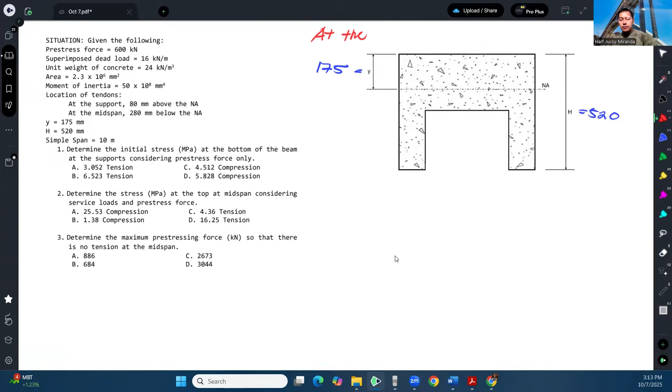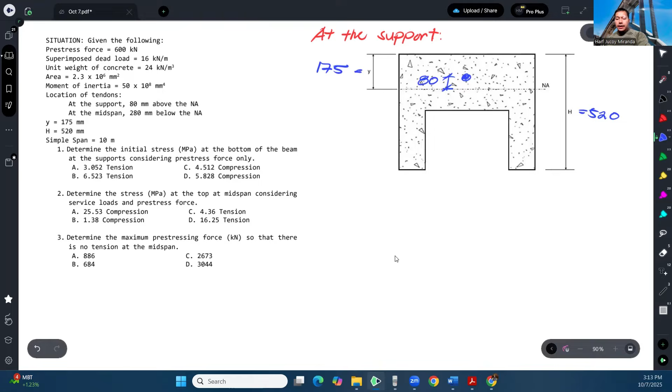So at the support, let me make a drawing. This is the drawing at the support, this is the cross-section at the support. So where is the tendon? It's here at the top, it is actually 80 mm - that's our eccentricity at the support. So if we look at the side view of the beam, it looks like this. This is the neutral axis, and this is the tendon.

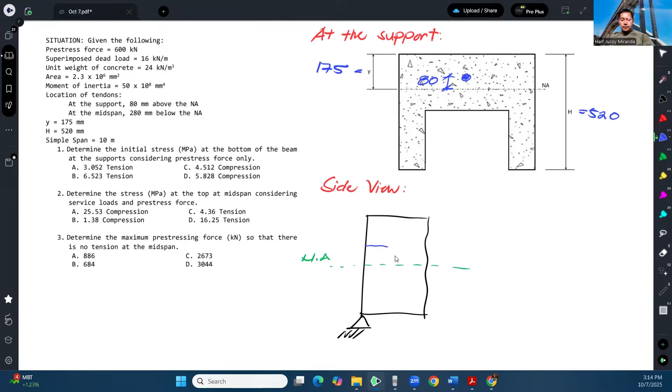I'll just draw it straight for simplicity, since this is at the end. So that tendon will have a pre-stressing force of P, which is counteracted by this and this. In this case, there's no mention of losses, so we don't need to worry about subtracting a certain percentage from the initial pre-stressing force - we will just use it as is.

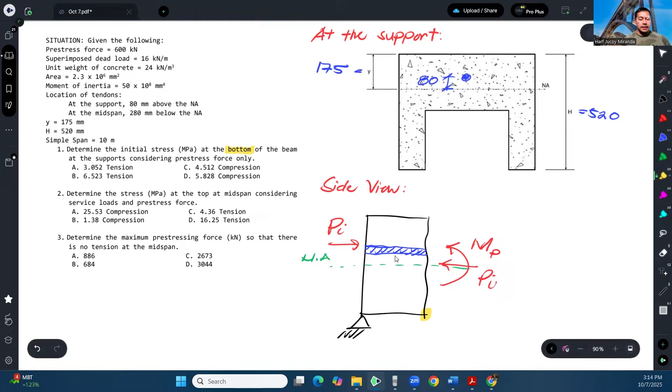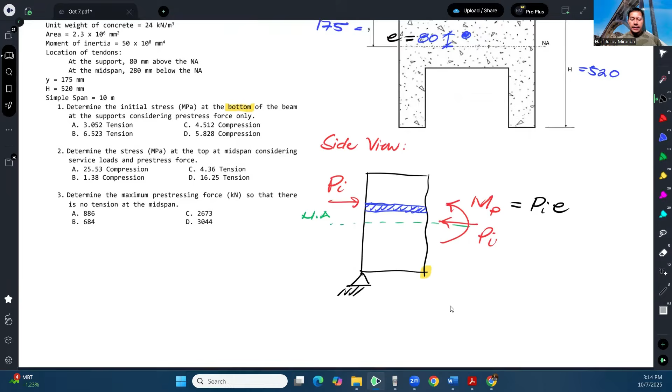So the question is, what is the initial stress at the bottom, here at the end of the beam? So what is this moment? Due to the pre-stressing force, that is the pre-stressing force times the eccentricity. In this case, this is our eccentricity. And then our distance to the bottom - this is the bottom - that distance is just 520 minus 175. We will need to apply that later.

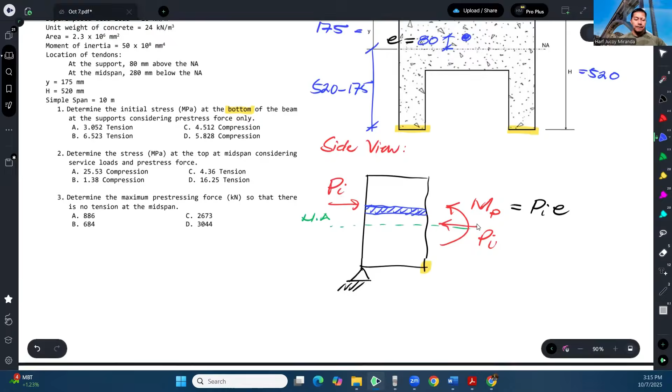So now, to calculate for number one, the stress at the bottom at the end of the beam, let's assume the convention that tension is positive and compression is negative. There's nothing wrong if you reverse your convention - that's okay, as long as you stay consistent. So if you say negative, that's compression, if that's your assumption. If you want it reversed, that's also fine - make compression positive and tension negative. Just stay consistent with writing the equation.

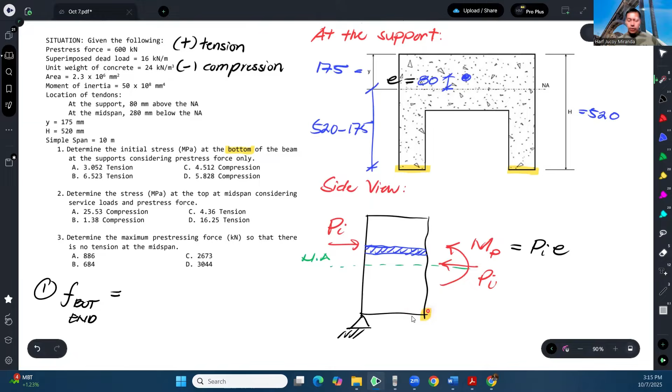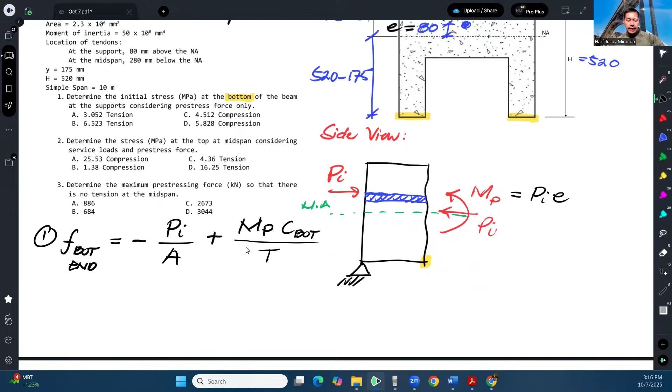So, stress at the bottom caused by P is compression - negative P over area. And the stress produced by MP at the bottom is actually tension - plus MC over I, where C is at the bottom. Let's write the values.

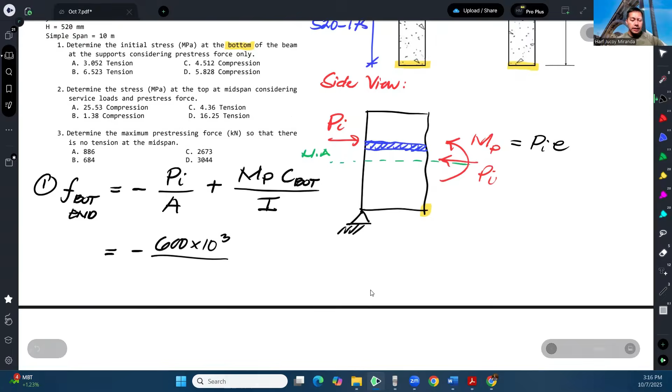The pre-stressing force is 600, so negative 600 - let's use Newtons so it becomes megapascals later - over area. The area is 2.3 times 10 to the 6. Plus, our MP is P times E, so 600 times 10 to the 3 Newtons times E, which is 80 mm. Then our C at bottom is 520 minus 175, over I. We're given the moment of inertia, which is 50 times 10 to the 8. So MC over I - let's compute.

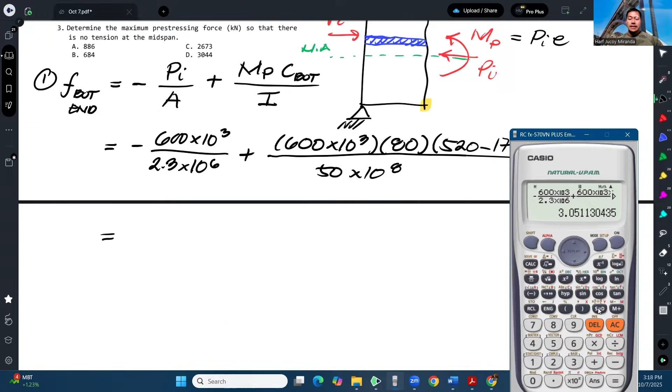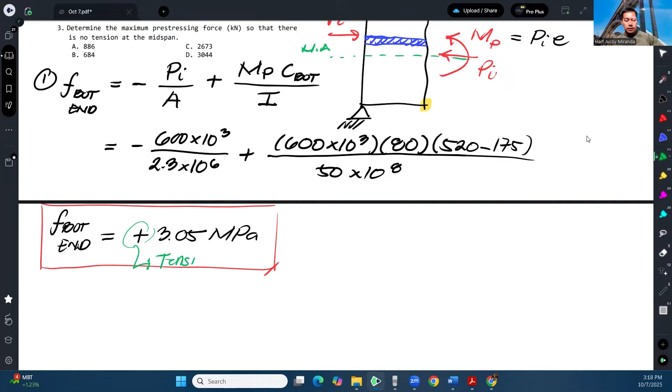Over 2.3 times 10 to the 6, plus 600 times 10 to the 3 Newtons times 80, that's the moment, times C, over I - 520 minus 175 over I. So that's gonna give us 3.05 megapascals, and it's positive, meaning this is tension. So positive 3.05 megapascals - that is our stress at the bottom at the end of the beam. Again, the positive sign indicates tension. So for number 1, the answer is letter A.

Next, determine the stress at the top at midspan considering service loads and pre-stress force. So where? At the top, at midspan. So what does the cross-section look like at midspan? It's not like before, because at midspan the tendon is located 280 mm below the neutral axis. So, number 2.

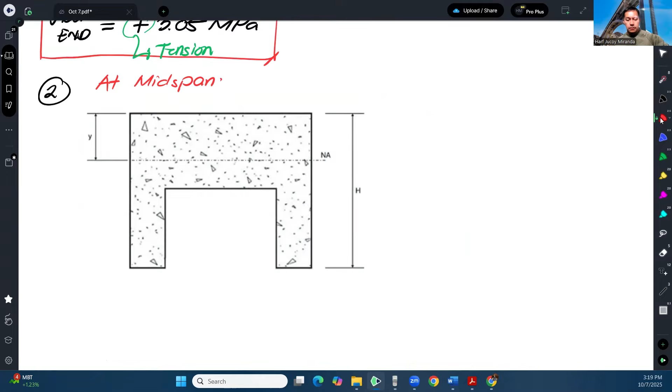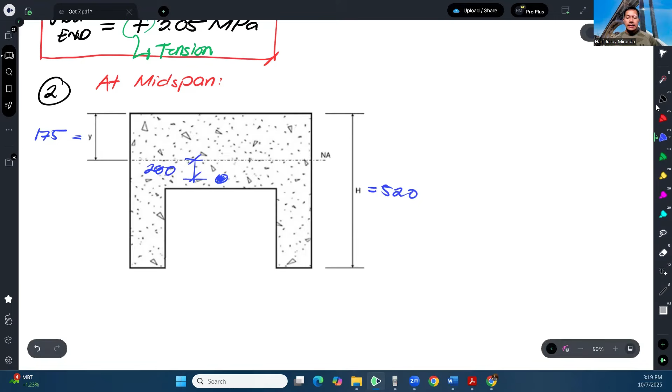Yung tendon natin nandito na sa bottom. And this is actually 280. So sa pinapahanap na stress ay at the top of the midspan. At the top at the midspan.

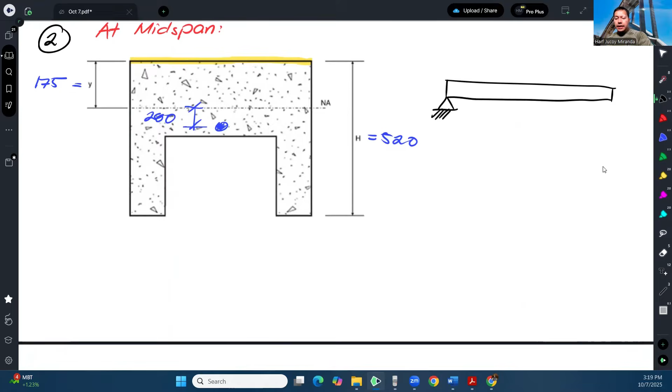Bali nandito, pinapahanap yung stress dito. Pero bago yun, ano-ano ba ang mga stresses acting at the midspan? Kapag nag-method of section tayo dun sa beam, kasi di ba yung beam natin ganito eh. Ito yan eh. Tapos meron tayong load dito.

Yung binigay na load, actually dalawa. Superimposed dead load. Ibig sabihin ng superimpose ay wala pang self-weight, ipinatong lang na dead load dun sa structure. So 16 kilonewton per meter.

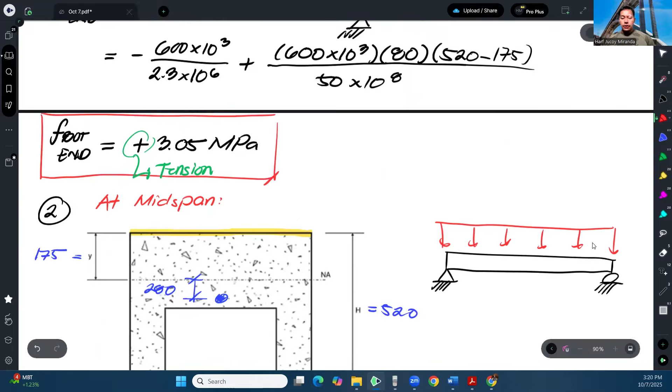Okay, so idadagdag natin syempre yung self-weight. Ang self-weight na binigay, dahil binigyan tayo ng unit weight ng concrete, kailangan lang ma-convert natin ito sa kilonewton per meter. Kasi kilonewton per meter cube yan eh, di ba? You will need to multiply the cross-sectional area para maging kilonewton per meter. So i-multiply lang natin to. Alright, so 24

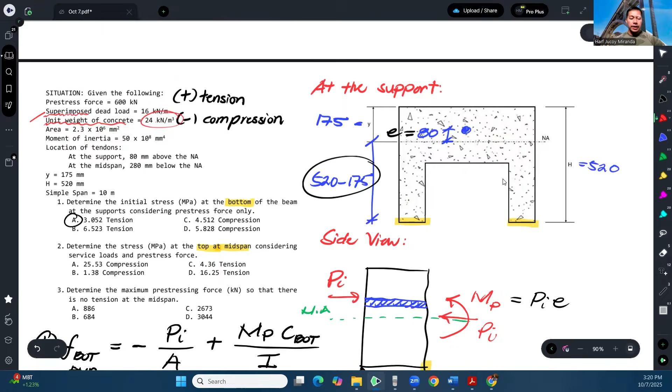Times area. Yung area na binigay naka millimeter squared eh, no? So para maging meter squared ito, 2.3 times 10 to the 6 millimeter squared. Para maging meter squared, di ba sa 1 meter merong 1,000 mm, so i-square lang natin. Pagka ginawa mo yan, magka-cancel lang to dito. Kaya may titira, this becomes 2.3 meters squared. Okay, so it's actually 2.3 square meters.

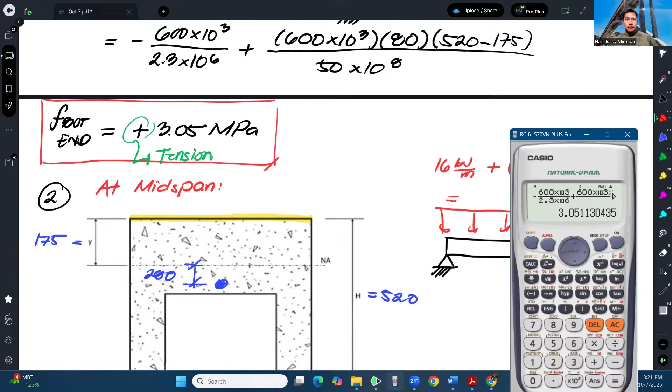Okay, so this becomes 71.2 kilonewton per meter. So yun yung magiging total load natin.

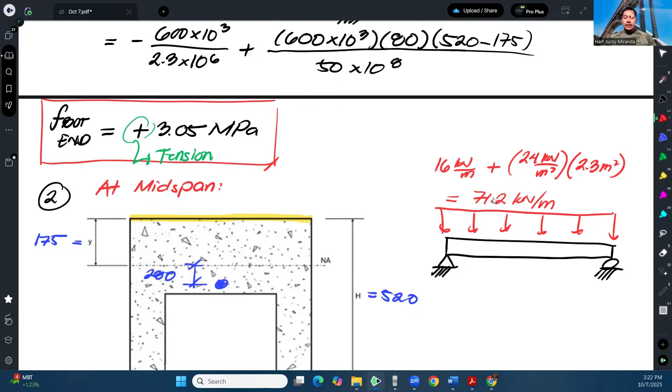Tapos dahil nasa midspan tayo, so bali ito yung midspan natin, kunwari. Ito yung section na to, yun yung midspan. Okay, so once again kapag nag-method of section tayo dyan, palakihin ko na lang ng konti.

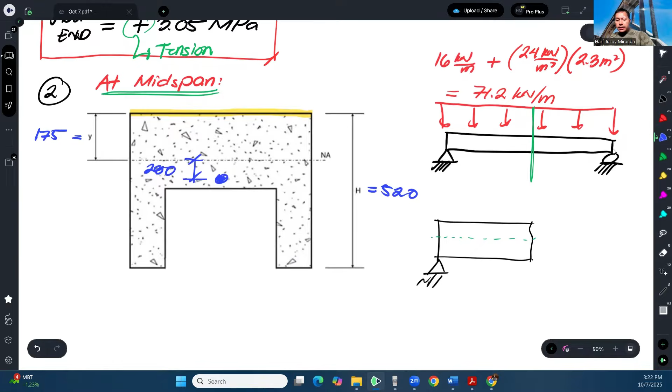Okay, so ang itsura ng tendon natin, dito sa, kung ito yung neutral axis natin, dito daw sa end, nasa top siya. So sa bottom, sa midspan, nasa bottom. So parang ganito yung itsura ng tendon niyan, naka-taper. Minsan ginagawa talaga yan, tinitaper yung tendon. Hindi lang siya straight na nasa bottom or nasa top.

So with that, ito, yung pre-stressing force na manggagaling dito, Pi, ay ika-counteract nito sa neutral axis and then itong moment na to. Okay, na maliban dyan sa pre-stressing moment and axial force, ano pa yung mag-a-act na moment? Dahil meron tayo ditong uniform load, once again sa midspan meron tayong moment due to the loads.

Ang moment na ipoproduce ng loads, kapag ka simply supported beam, once again it's going to be a positive moment. Dahil nga ang moment diagram nito, ganito ang itsura. Pag ganyan, di ba? Ito yung moment diagram niya.

Yung moment diagram actually dito alam na dapat natin kung ano yung uniform, ano yung moment diyan. That is WL squared over 8, di ba? And this produces a positive bending. So that's why kapag positive bending, nasa top yung compression. Kapag positive bending, ganyan naka-smile, kaya nasa top yung compression, nasa bottom yung tension.

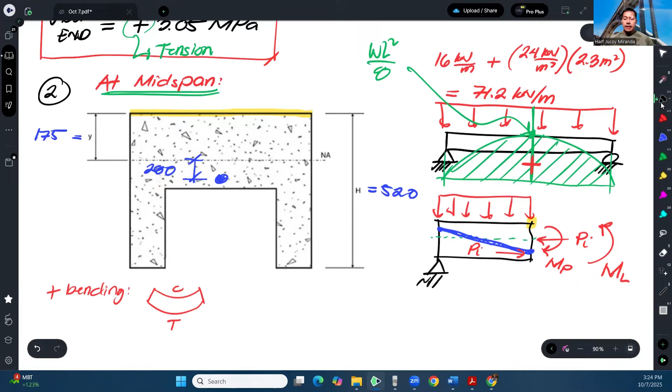So we will just apply yung combined axial and bending na formula. So stress at the top, at the mid, would be equal to negative Pi over A, and then yung effect ng MP ay tension, kaya plus MP C sa top over I. Okay, and then yung effect ng load, moment due to load ay compression, kaya negative ML C sa top over I. So ganyan, that's going to be our stress.

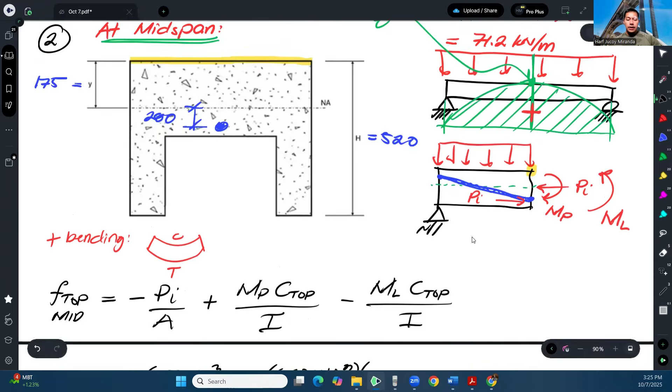So lagyan lang natin ang values. Negative P, which is 600, gawin ulit nating Newton. Area is 2.3 times 10 to the 6, plus MP. So 600, gawin nating Newton. MC, yung E natin dito, ito ha. E natin dito, ayan. Okay, so that's gonna give us 280.

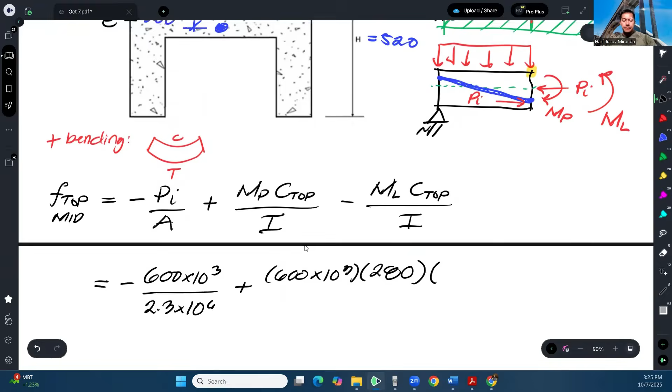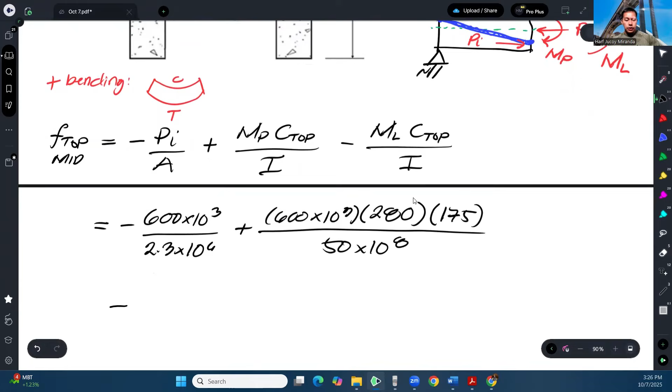Okay, so C sa top. So ano yung C sa top? Dahil ito yung neutral axis, yung C at ito yung ina-analyze sa fibers, yung C natin ito, 175, over I. Yung I na given ay 50 times 10 to the 8. Okay, and then lastly yung moment due to the load. Sabi ko nga, dahil simply supported beam lang naman, ito yun, WL squared over 8. Yung L natin sa problem na to ay 10.

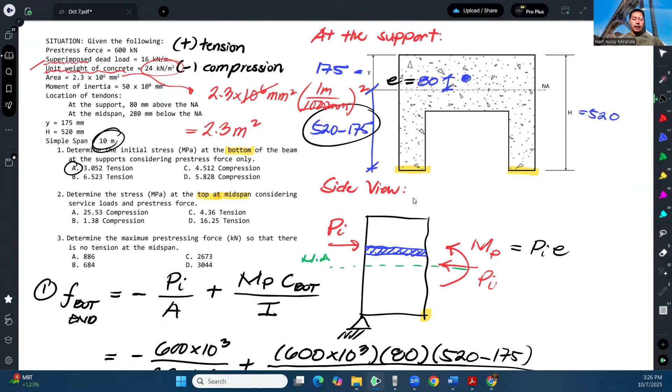WL squared over 8, and our W is 71.2. So 71.2 WL squared over 8. Then let's convert to Newton millimeter, since this computes in kilonewton meter, kilonewton per meter, and meter. So to get Newton mm, since our target stress unit is megapascal, which is Newton per mm squared, we need to convert to Newton mm.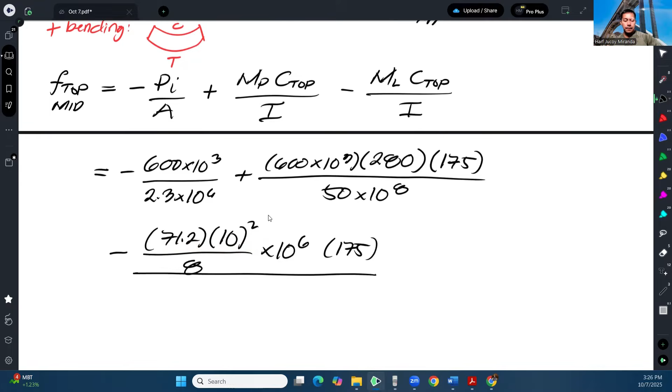So MC at the top, where C at top is 175, over I. That's how we get it, and from there we can compute the stress at the top at midspan.

Let's go back here. This is negative, this is positive. We have 280, and this is 175. MC over I is positive, then negative: 71.2 times 10 squared over 8, times 175, over 50 times 10 to the 8. So that gives us negative 25.53 megapascal.

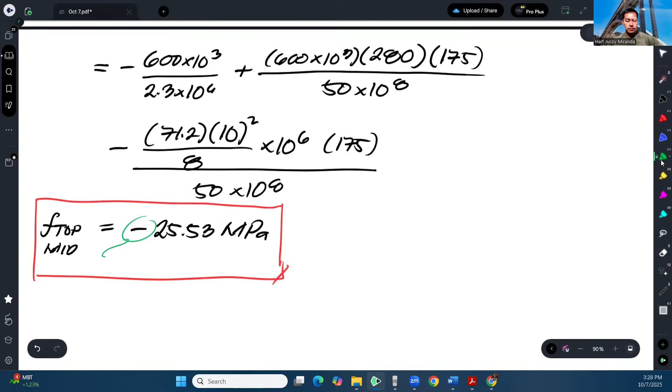Once again, the negative sign here indicates that this is in compression. So that's why our answer here should be letter A.

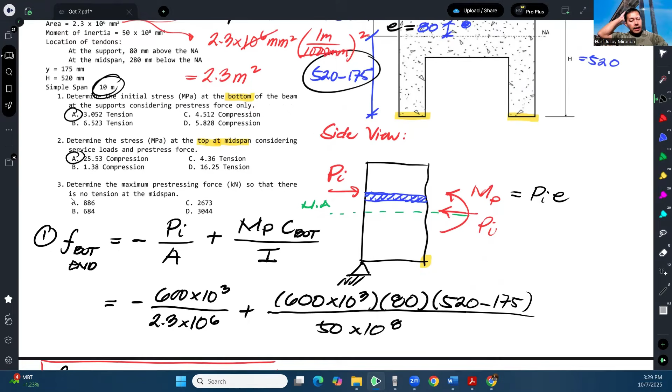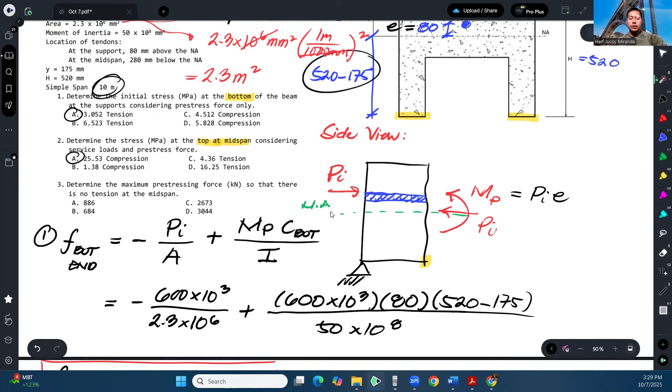And then lastly, determine the maximum prestressing force in kilonewton so that there is no tension at the midspan. So what is the maximum prestressing force so that there's no tension at midspan? Where can tension be produced? Here again - for a simply supported beam, imagine first without tendons.

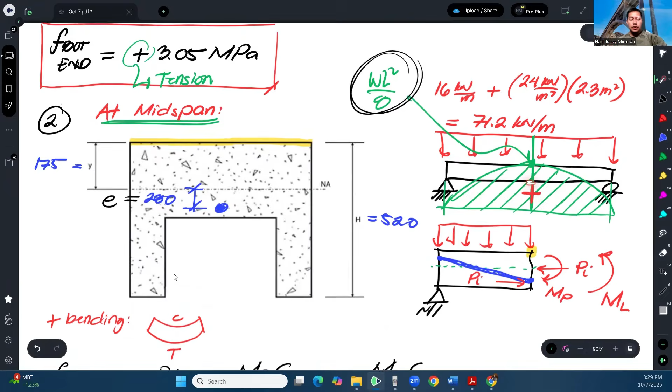Since positive bending is produced at midspan, the tension is at the bottom. So we need to analyze this: the stress at the bottom should become zero. So for number 3, our analysis is that the stress at the bottom should be zero.

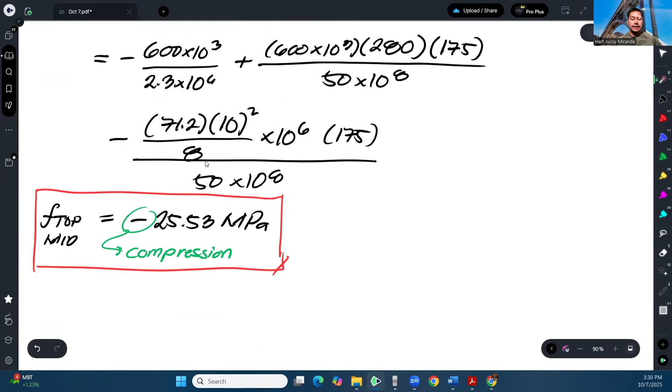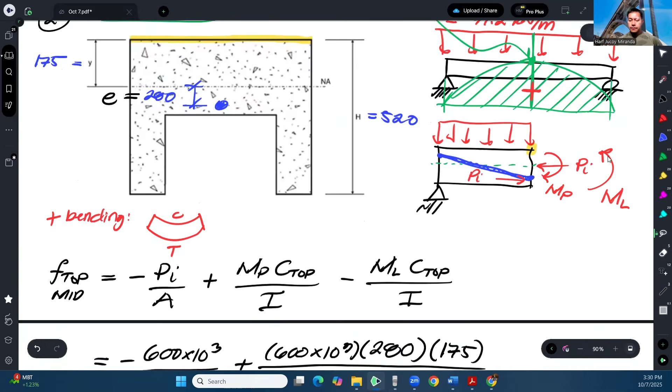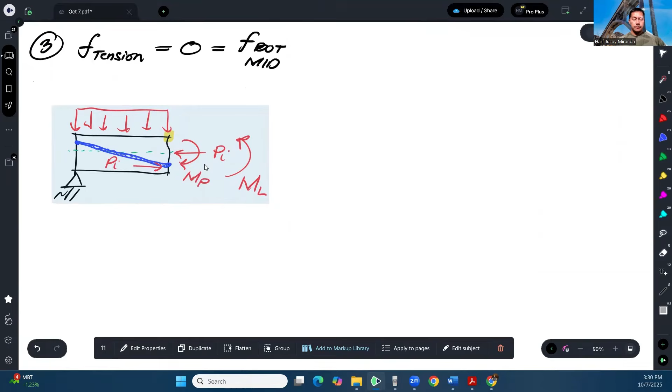So our analysis now is like this - let me just copy this. And then this is 71.2 kilonewton per meter.

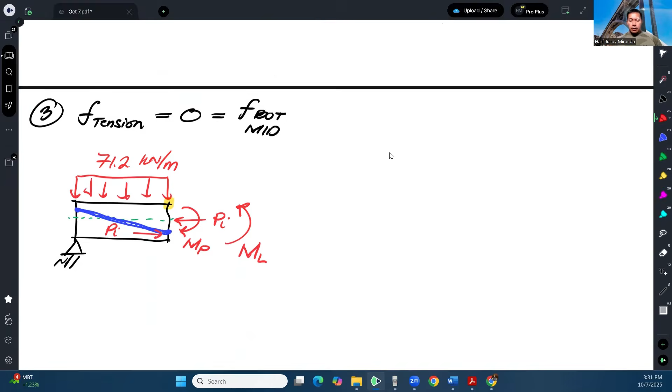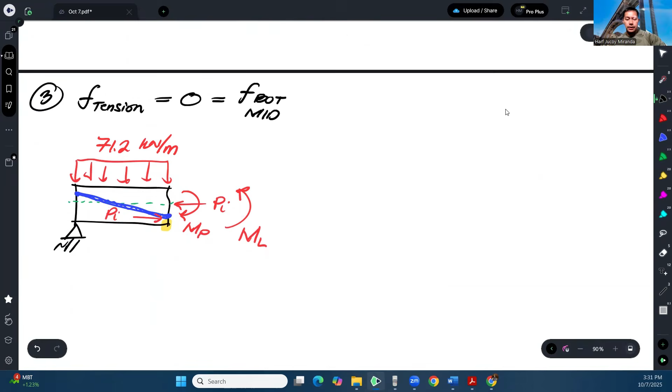Due to PI, negative because it's compression. Then due to MP, compression again, C bottom over I. Then due to the loads, ML is positive because it's tension - ML C bottom over I. So that's it, and that should equal zero.

So we write: 0 equals negative PI over A. Let's pattern it after our solution earlier. So for this, let's treat it right away as kilonewton - multiply by 1,000 over A, which is 2.3 times 10 to the 6. Then MP is PI again times 1,000 to make it Newton. Then our E here is again 280.

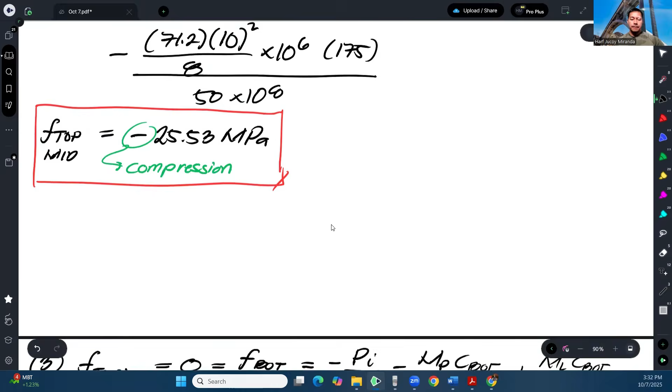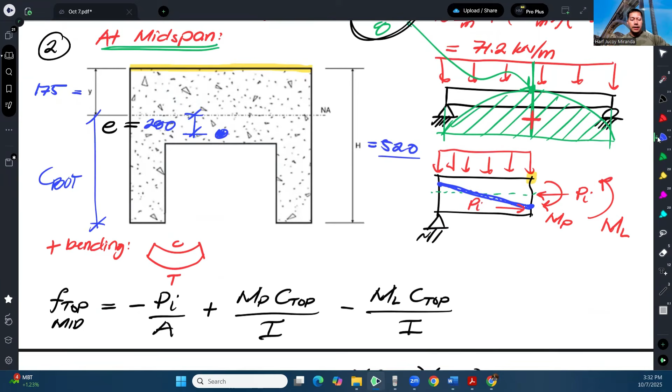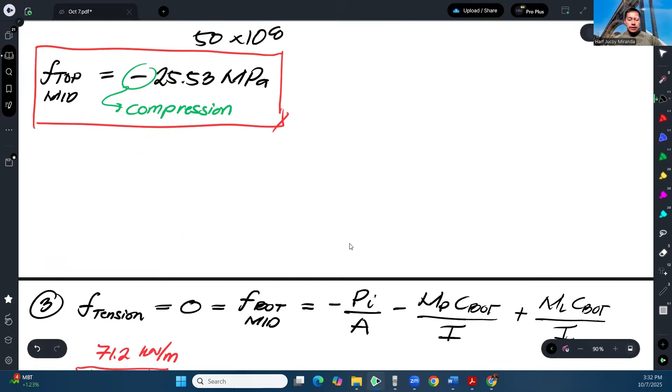Then our C at the bottom, at the midspan, is this - since this is C at the top. So what is that? That is 520 minus 175, over I, where I given is 50 times 10 to the 8. And then plus ML, the moment due to loads, which is still this.

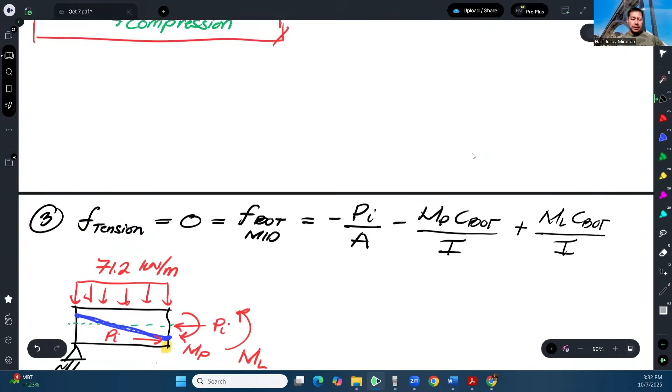So that's 71.2 times 10 squared over 8 - let's make it Newton millimeter. Then our C is 520 minus 175, over 50 times 10 to the 8. From there we should be able to calculate for PI.

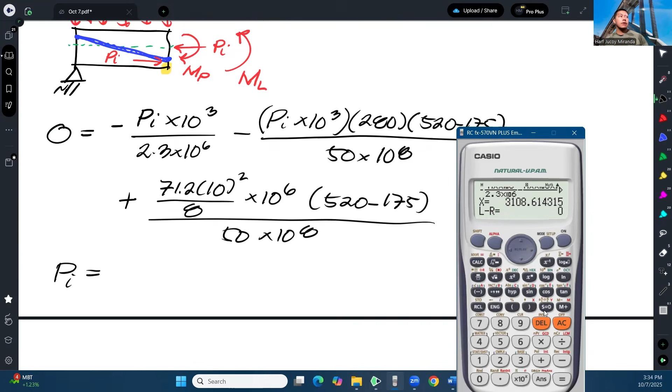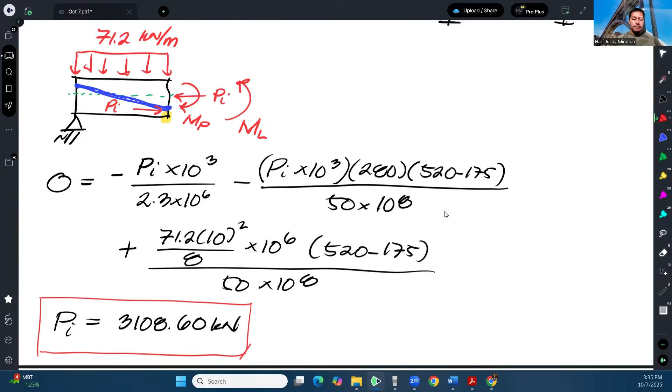So that's 3,108.6. That is the required prestressing force so that there will be no tension in the bottom part of the beam. So the closest answer would be letter D.

And that's how we solve this problem.